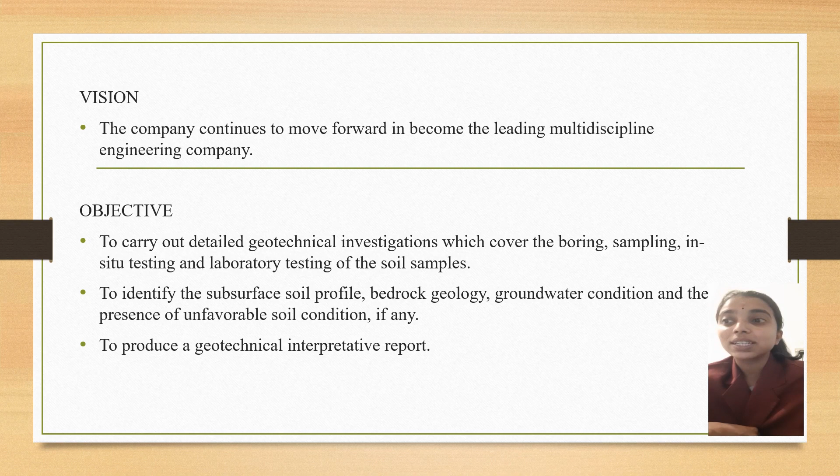There is also the vision and objective of this company, which is to move forward and become the leading multidiscipline engineering company. And when it comes to objectives, it is to carry out detailed geotechnical investigations which cover the boring, sampling, in situ testing and laboratory testing of the soil samples, to identify the subsurface soil profile, bedrock geology, groundwater condition and the presence of unfavorable soil conditions, and also to produce a geotechnical interpretative report.

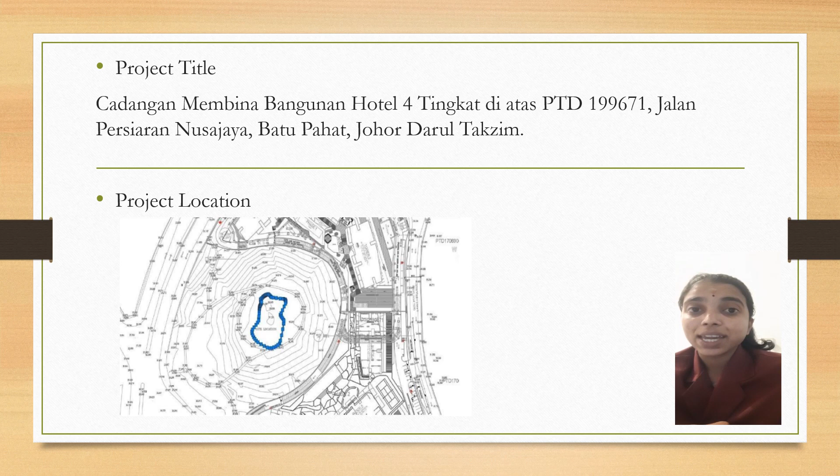And here is the title of the project: 4 levels hotel on PTD 199671 Jalan Persiaran Nusajaya, which is located at Batu Pahat, Johor. And here we have attached the map location of our project.

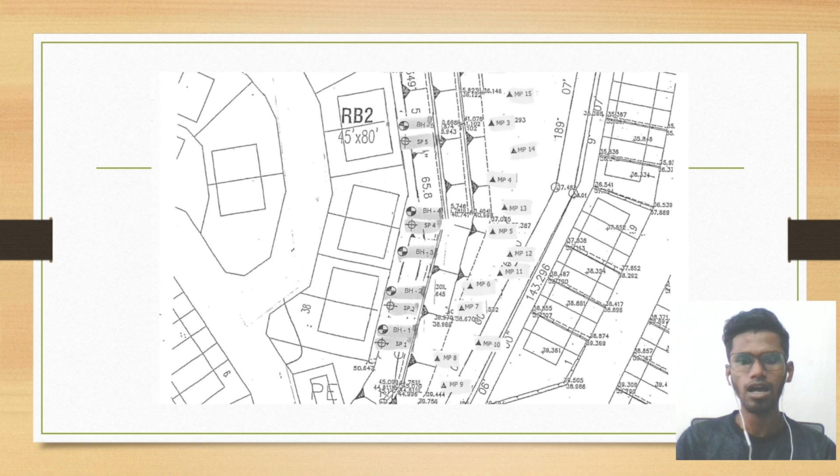The subsurface profiles were determined using the data obtained from borehole 1 to borehole 5. The following is a description of the proposed site soil profile. The site is directly underlain by 7.5 meter soft sandy silt. The soil layers consist of weakly compacted fill material imported from within the surrounding area.

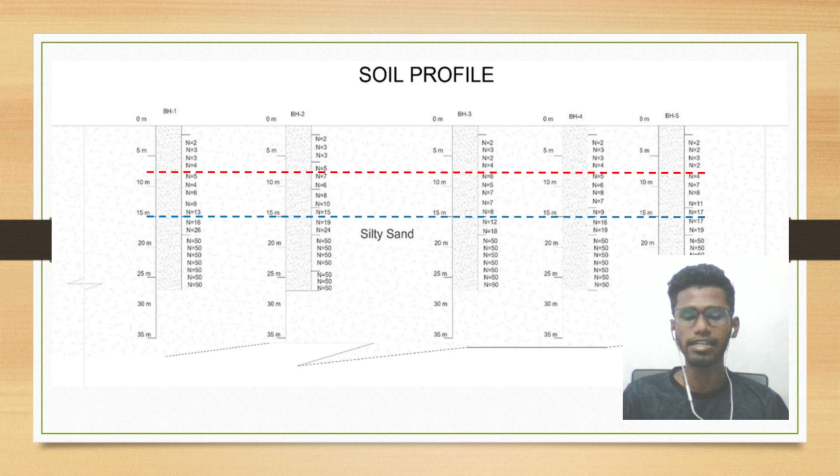Bore log 1 to bore log 5 shows that the groundwater level ranges from 8 meter to 9.2 meter below the surface ground level. The analysis determined the design groundwater level at the existing ground level.

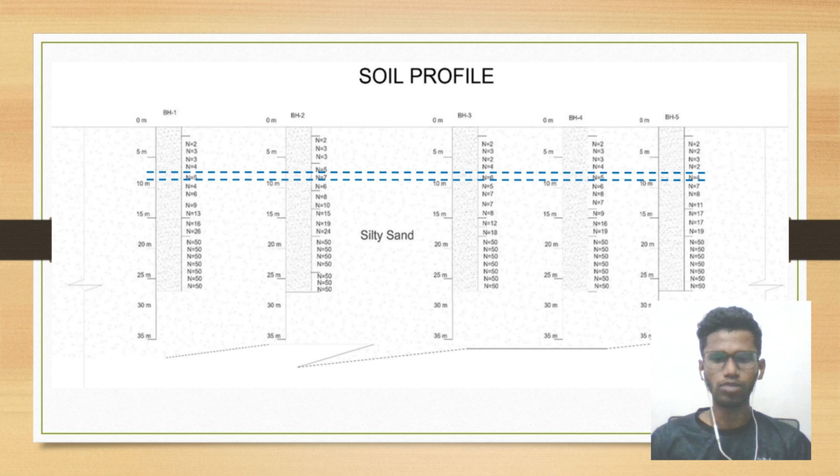Today, I want to explain about the foundation analysis. The type of foundation we choose for the analysis is shallow foundation. Shallow foundation is a type of foundation used for the building to transfer the load to the earth near the surface, rather than to a deeper layer.

A shallow foundation is considered as such where the width of the entire foundation is greater than its depth. In comparison with deep foundation, shallow foundations are less technical, thus more economical and most widely used for rather light structures.

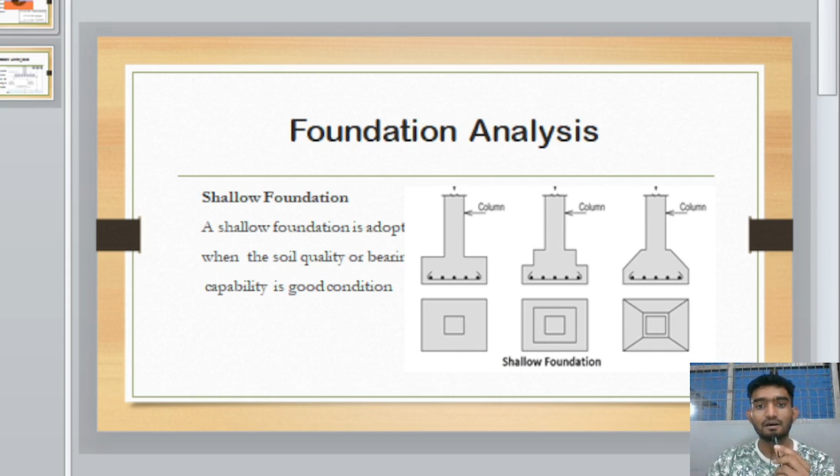From the present ground level, the loose sandy layer thickness ranges from 1.5 meter to 7.5 meter. The dynamic compaction method is appropriate for densifying the soft sandy layer, and the compaction gives high bearing capacity and reduces post-construction settlement. Next is the allowable bearing capacity.

It is the maximum bearing capacity that can be applied to the foundation such that it is safe against instability due to shear failure, and the maximum tolerable settlement is not exceeded. The shallow foundation allowable bearing capacity can be calculated using the Terzaghi method, analyzed for the square foundation. The shallow foundation permissible bearing capacity is generally believed to be 100 kN per meter square.

The allowable bearing capacity of the different sizes of shallow foundation used for the square is 1 meter, 1.5 meter and 2 meter at the various depth of embedment is presented.

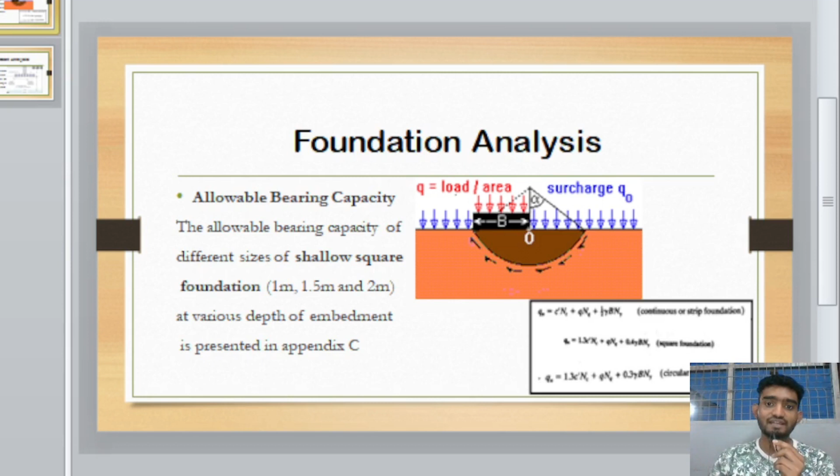Okay, next is settlement analysis. The foundation settlement must be estimated to avoid excess and differential settlement, which can cause serious structural damage if the tolerable limit is exceeded. Because the soil at the location is sandy, immediate settlement is considered as part of the settlement study.

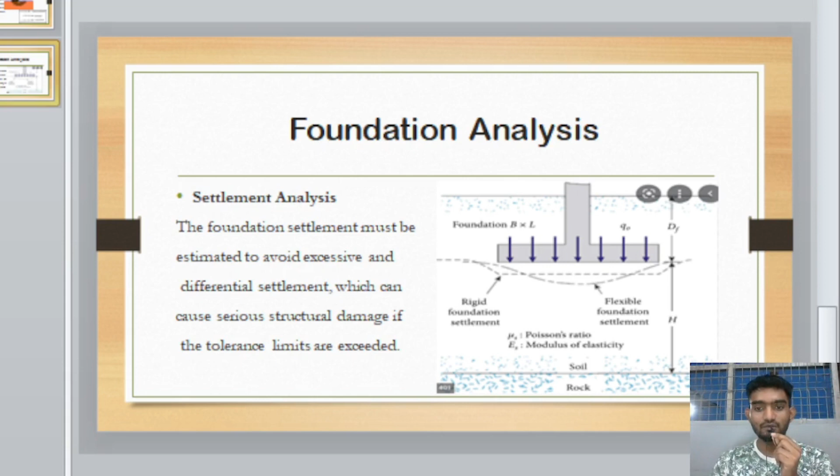The implementation to minimize the settlement even more is to position the foundation at a certain depth below the ground level.

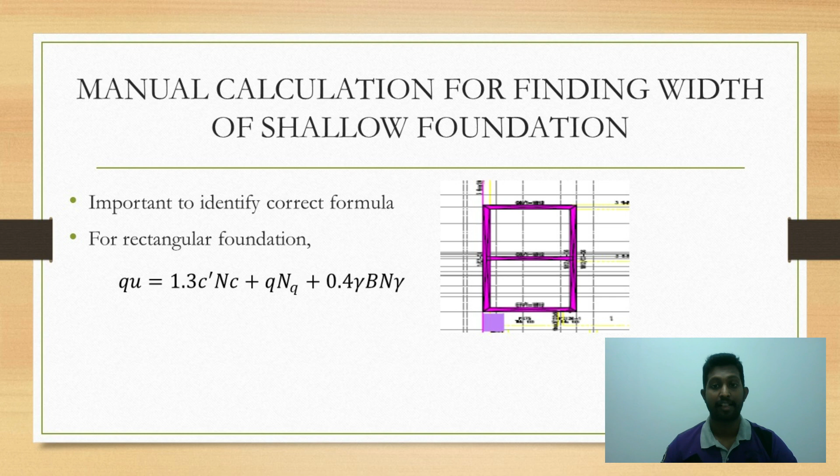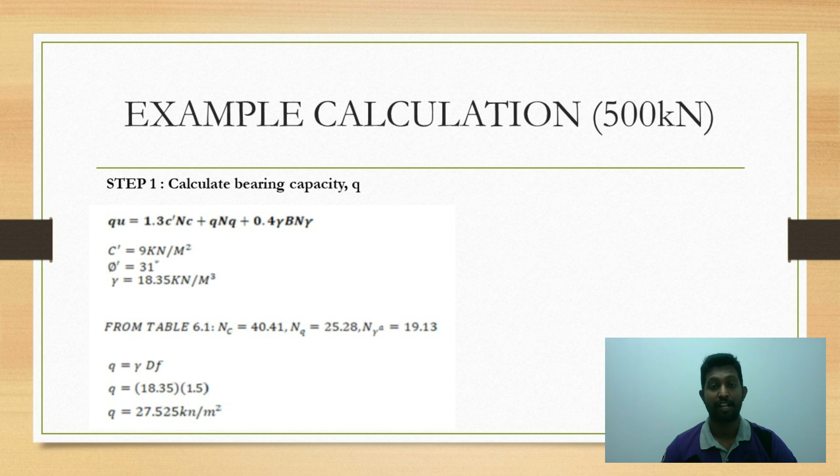Example calculation for 500 kN load. The first step is to calculate the bearing capacity of the soil. Before calculating the ultimate bearing capacity, the values of Nc, Nq and N gamma must be obtained from the table. Once the ultimate bearing capacity is obtained, the allowable bearing capacity needs to be derived. This allowable bearing capacity is essential as it is the amount of load the soil can withstand without experiencing shear failure, and its value will be used to determine the width of the foundation.

From the calculation, we got the value of the width between 1.07 meter to 1.3 meter through the trial and error method. Therefore, we have selected 2 meter width for the foundation design considering other external factors.

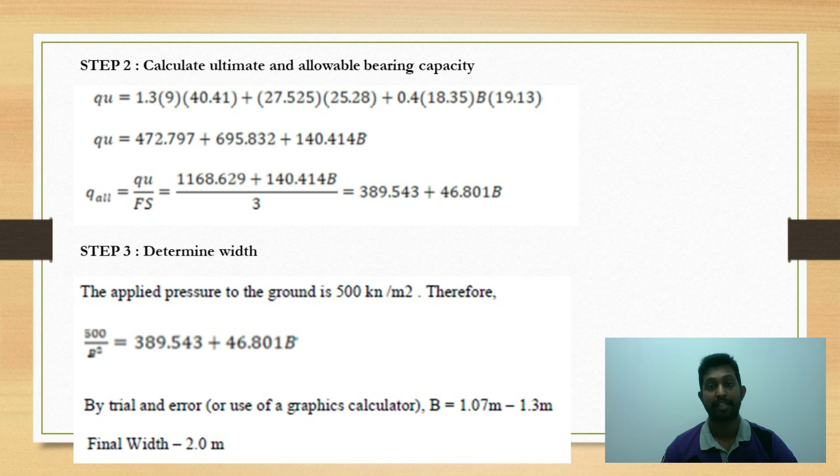Hello everyone, my name is IP Guganesi. I'm going to present the conclusion and comments of this project. This project is based upon the instruction of the Project for Foundation Engineering BFC 43103, aiming to design a foundation for each important point from the borelog of the Soil Investigation Report. The main focus is on the fundamentals of foundation design.

After all consideration was made of the principal soil properties needed for soil classification, the location of the water table and the properties related to the shear strength and compressibility of the soil, our group members chose to design a shallow foundation for the structure.

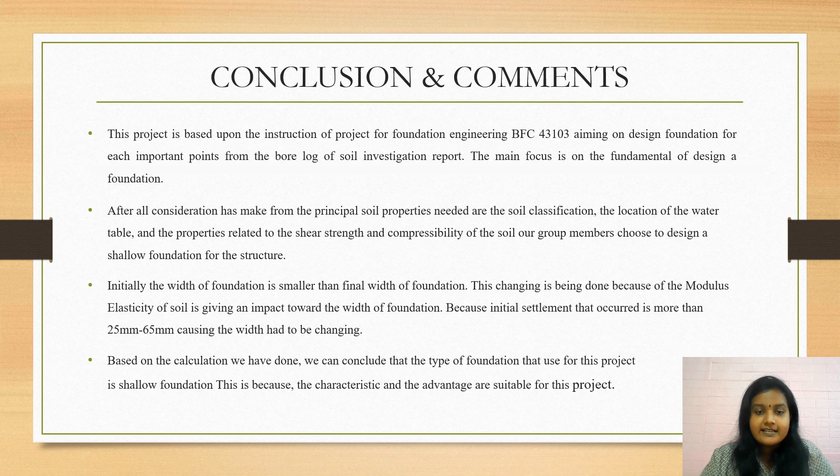Initially, the width of the foundation was smaller than the final width of foundation. This change was made because the modulus of elasticity of the soil has an impact on the width of foundation, because the initial settlement that occurred was more than 25 mm to 65 mm, causing the width to be changed. Based on the calculation we have done, we can conclude that the type of foundation used for this project is shallow foundation, because of its characteristics and advantages suitable for this project.